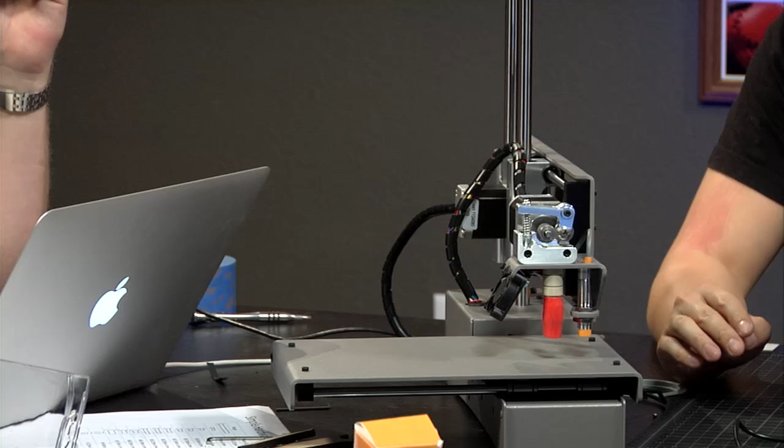So first things first, you've probably never seen me do this before even if you've watched every MakerBot mystery object we've ever done, but I've got to put tape on the build surface. All right, so explain the tape. Why is that painter's tape? This is blue painter's tape. It is 3M 2080EL, slightly more expensive than the generic 3M painter's tape. You mean the small, narrow, cheap ones?

Painter's tape is priced on both the width of the tape as well as the relative stickiness. Since this is going to go on the build platform, you want less sticky. What we do is just put it over the build platform, and I'm going to tear the— oh hellfire, there it goes. Okay, there we go, this is hard to do from this angle. This is not super sticky, but you kind of want to get no bubbles, and I just do a rundown.

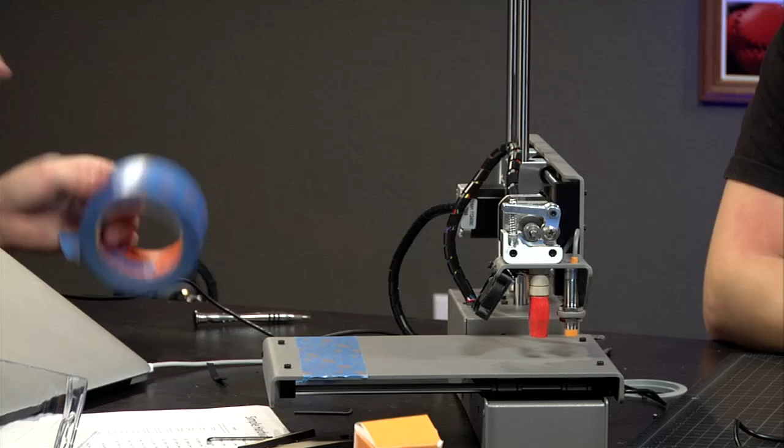Usually I use what's called Kapton tape, which you may remember from the space program among other places. It's space age technology, and what this does is give a better surface for the print to adhere to. This tape you use mainly because it's cheap and makes it a little easier. The reason you don't just use the metal is if you crash the print head into the metal, you can damage the print head, the nozzle, as well as scar up the print bed, both of which are bad for the quality of your prints after that point.

So it's very soft, basically a thin layer of protection to prevent you from doing something super dumb. It also makes it easier, like with a heated build platform such as our MakerBot Replicator 1 has, you can vary the temperature of the build platform to help release the print. The prints get really sticky, so all I'm doing here is lining up with the edge so there's no overlap, and it's even okay if there's a little bit of a gap, and then I'm pressing down.

It's super exciting stuff, but we wanted to show everything, so here you go. I think I got maybe one more piece. Now I might get you to do one.

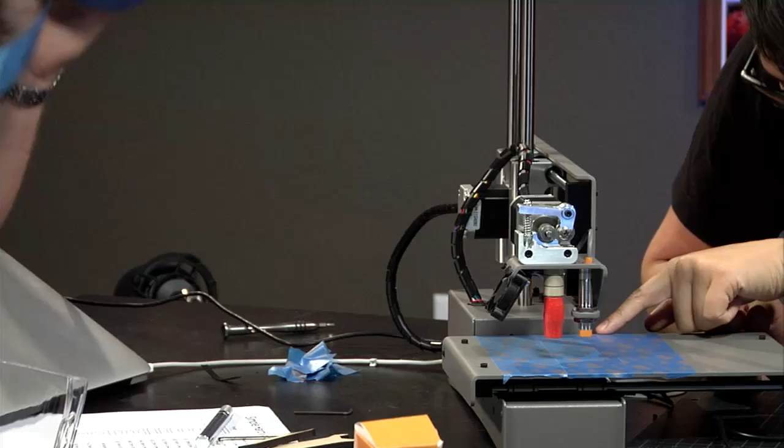How often do you have to replace this tape? It really depends on how often you gouge up the tape. Oh, you've left some gaps. That's okay, a little bit of a gap's not a problem. All right, you want to minimize those gaps as much as you can. I'll probably go back and redo this after if we use this for any mystery objects in the future.

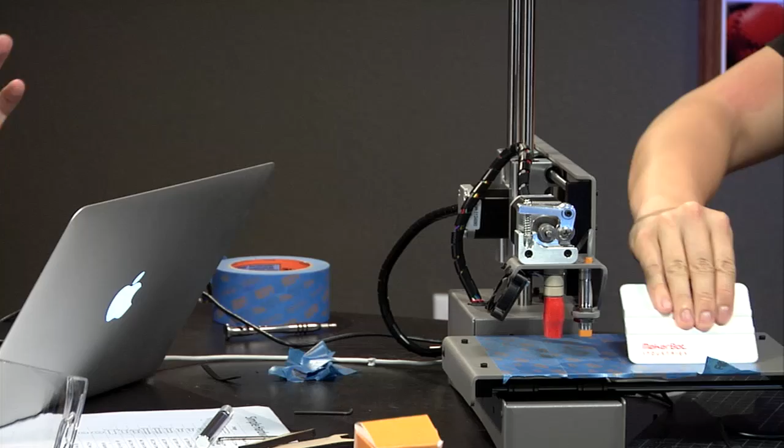And you also don't want to overlap. You definitely don't want to overlap, because what you're talking about is a printer that can print in 100 micron increments. 100 microns is about the thickness of a business card, like a good piece of cardstock or a decent sized piece of paper. If you have overlaps, the print head will crash into those places that the overlap runs, if you have the setup properly.

That's pretty good, a gap I got there. Did you nail it? No gap. Nice job. Never forget the gap.

So the first thing we're going to do is get the height on. We got two things over here. This guy on the left, the metal thing with the orange tip, is the auto leveling probe, and it's a contactless probe, so it has a sensor that detects metal when it gets close to it.

That'll trigger. There's a light on top that'll go off. The way you do this is you set it up so that this triggers when the print head is just touching the surface of the print bed.

Yeah, and there's somewhere here a little square piece of Delrin that's the right thickness. Is it underneath the printer? Square piece of Delrin. Oh, here it is. I moved it. That is more or less the height you want the sensor off of the print bed.

That's good, so you can calibrate. Sorry, I moved the printer, and now Joey has to run in here and change stuff. So I'm going to run this down just using my hand to turn the axis.

And we're going to run it down until just when it touches. Now figuring out just when it touches is surprisingly difficult. Oh boy. You're gonna get the extruder hit before you get the... You want that? We want that. Extruder is just—see, you can't tell because there's a shadow.

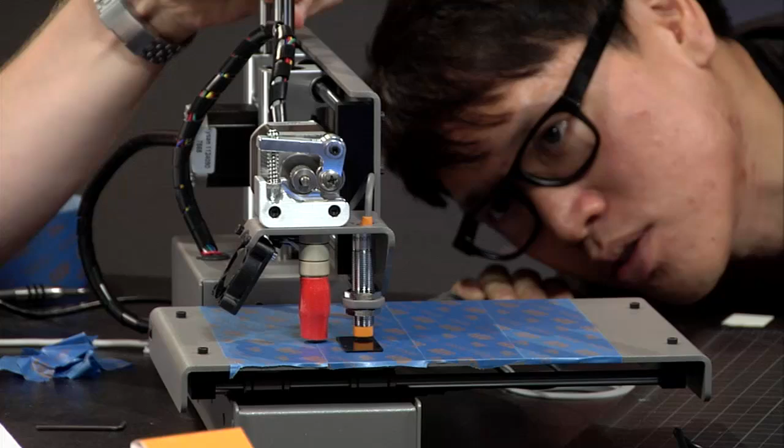Do we need a business card? A business card's not what we want. We want it actually touching, so we need something thinner than a business card. How about a piece—can you cut one layer of that? And we'll slide that under there to see.

The problem is there's always a shadow, so it's really tough to tell. I'm going to reach down here and grab a flashlight and see if that helps. Also, I'm right on a tape border, which is not good.

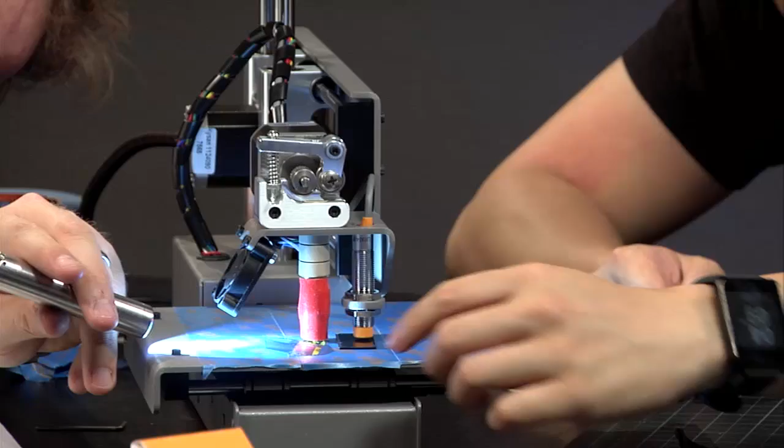I think that actually is looking—that's looking. I can still move this. Does it still move? So what I'm doing is, you don't want to push down on the print bed at all. Is that moving still? Yep, still moving. Oh, nope.

Okay, so a little looser than that. Okay, I think that's pretty much it. I'll go back down just... oh no, can't get under now.

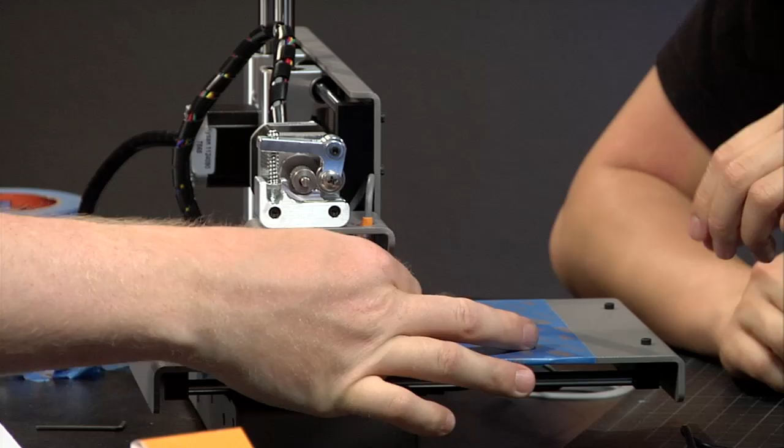Okay, that's good. So now what we're going to do is use these two kind of crappy wooden wrenches to move the sensor down. Which one? Those two nuts, and one of them's already... let's see, I think we need to go up on this one and up on this one, right? Yeah.

Actually, this is a good time to turn it on. So would you plug it in, because we want to see that light trigger, and we want it to trigger. All right, so I got power right here. I'm just going to plug it in the bottom.

There. Is there a power button at all? No power button. If it's plugged in, it's on. All right, it is plugged in.

Power supply right here. Let me switch over and see if my software detects it. Unknown printer, firmware disconnected. I'm not going to connect yet because I don't want it to do anything. But it has detected it, which means it's on.

There are no lights on this thing, no feedback whatsoever, except for... Okay, I am going to go to connect and go ahead and do it.

Okay, so Joe, if you want to switch over to the computer—this is Repetier, or Repetier Host. It's the Mac version of it, obviously. Basically what we're seeing is an emulation of our print area here. This is all the controls. This is a much more raw version of the software than we're accustomed to with Makerware. It's very reminiscent of Replicator G.

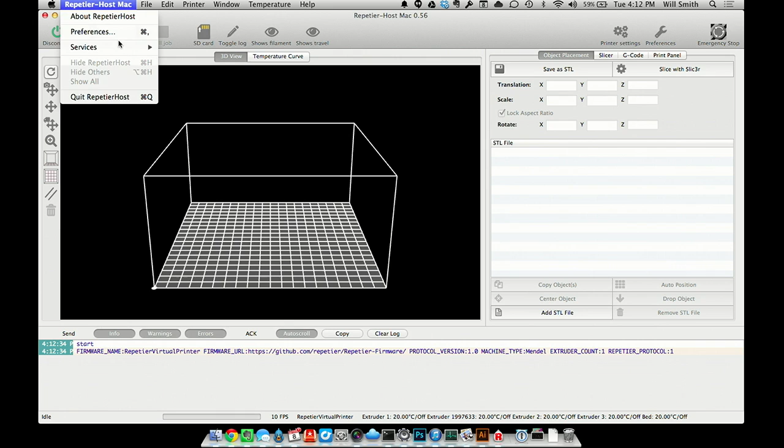Oh, and I'm hooked up to a virtual printer because I was noodling the other day. So let's go.

I'm going to disconnect. Do you need me to tighten and loosen these? No, leave it for right now. We're going to do USB modem 1, 2, 3, 4. Hit apply, hit OK, and we're going to connect.

Okay, so you can see on the bottom there it says firmware Marlin V1, Sprinter/grbl mashup for gen6 firmware. Nice. Printrbot protocol version 1.0, machine type Printrbot, extruder count 3. That's probably not right, but we'll get there.

Extruder count is 1, but it knows that Marlin, which is the open source project that builds the firmware for this particular printer among a bunch of others, including I think for the Makerbot—or Sailfish is the version of Marlin for the Makerbot.

But we have, let's see, extruder temperatures down here. I can do some stuff, so I'm going to go back. I've connected, we've done that. I'm going to go to the print panel and give the following commands in this order.

Okay, I'm going to give you... I will read them out. This laptop, so you can... very NASA. Or this iPad, so that we can do this.

See, this is a Chrome window. I'm going to Chrome this onto another device. It's my favorite feature of Chrome.

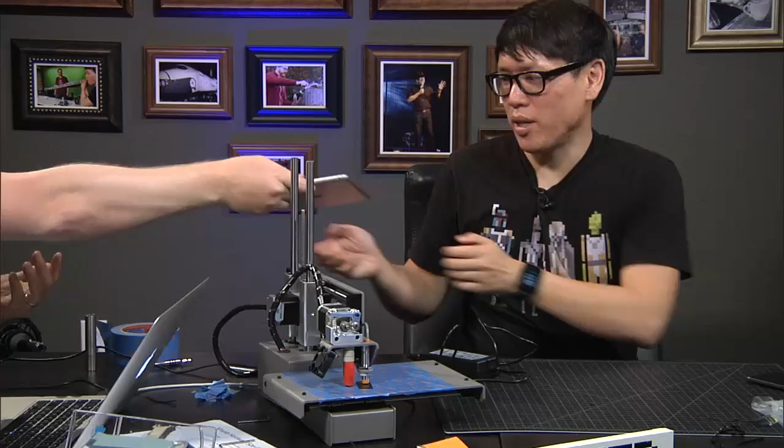There you go. Okay, all right. So we're on step 3. Heat on. I'm going to the print panel.

Give the following commands: heat on, okay, home X. Home X. Oh boy, something happened. Yep, X has now moved to its home.

Okay, now hit home Y. Whoa, okay, that's the Y-axis. Now we... oh, whoa, stop. Let me know if I need to pull power at any time. I don't think our Y-axis is tripping.

So these are the switches. Yeah, let's go. Should we turn off the power? No, because from this program, if you go back to the computer screen, you can manually adjust the Y-axis. I'm doing that right now. So as you tap, it moves 100 spaces. Yeah, okay, 100 spaces.

Okay, I'm going to hit the button. All right, is that stop? Is that triggering anything? No, I don't think so. So that tells us that isn't plugged properly into the board.

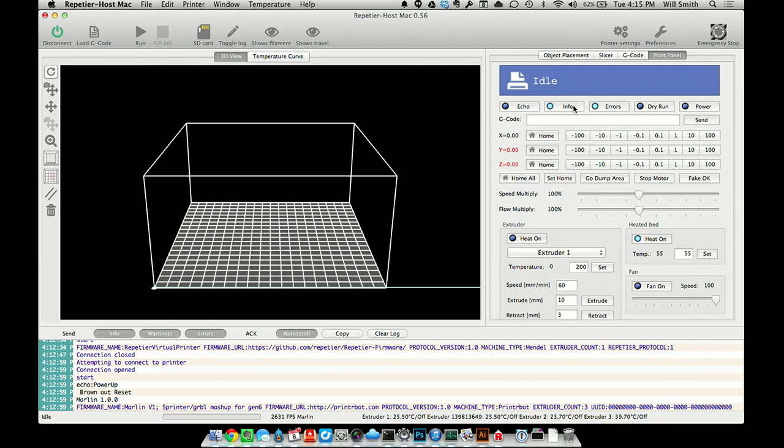I wonder if, but the X-axis did go right? I'm not 100% sure, because it doesn't look like it's centered on the X-axis either. It shouldn't be centered. It should be. Okay.

Okay, so I'm gonna hit home. Whoop, whoop, whoop. Okay, yeah, no, that is right. I'm pretty sure.

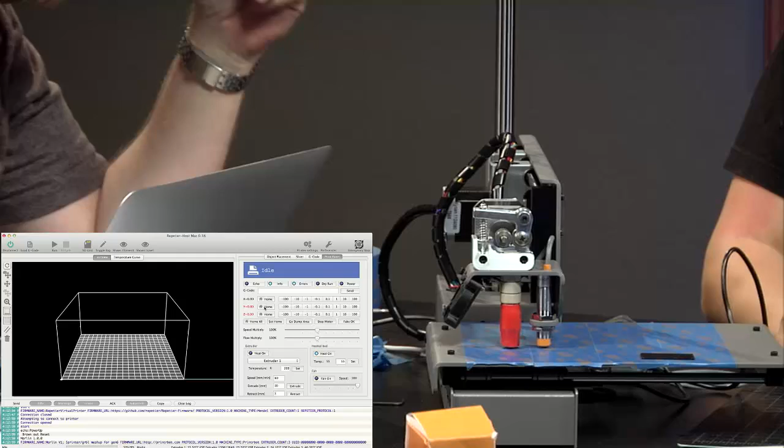It's a robot, you're telling it to do things. It is. I control the robot. I control the horizontal and the vertical. Well, you're controlling the horizontal and the other horizontal.

Okay, let's see, I'm going to turn on acknowledgements. Nope, that's not a good thing. That's too much.

Let's see if I can see if the trigger is working. Yeah, I want to see if there's... let's see, that's G-code, that's slicer. I can't see if the print...

I'm going to try it again and see what happens. Oh boy! Oh boy! Oh boy! Nope, stop motor, where's the stop motor button? Okay, there it is, it stopped eventually.

Where's the trigger? Actually, where's the physical trigger? We need to tighten that. Oh, tighten, yeah, I did a pass on tightening, but this is real. This is weird.

If you want to tighten those, cinch them down a little bit more. You feel that? Okay, it's still way loose. Just keep going, that's super loose. It's much looser than before.

Yeah, I think you're about to get as tight as you can get, so we might have to take that apart and redo those zip ties. Yeah, I am totally, yep, this is the tightest as it can get. See? That is way too tight. Or way too loose. Way too loose.

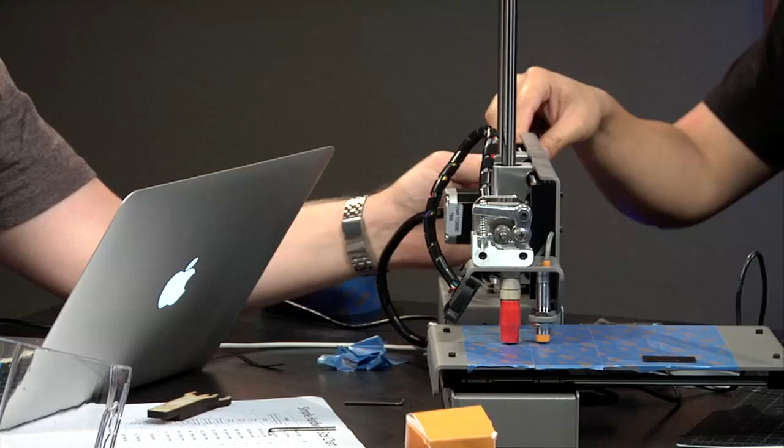Okay, so let's unscrew that. Okay, go ahead and unscrew that. That's a relatively easy fix. I'm going to start working.

Let's unplug it first. Okay, let's check the Y-axis switch to make sure I did actually plug it in and it's plugged in the right place and all that jazz.

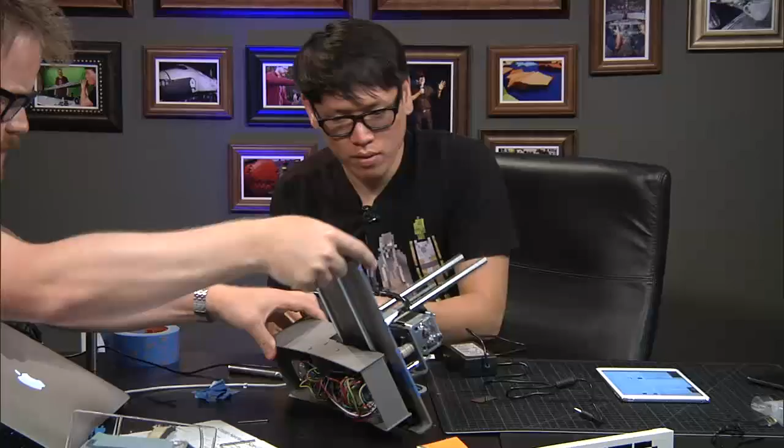And this one I can just unplug. Yep, all right, I'm going to put this down on its side. It's okay, okay, so this...

Okay, so that should be the Y-axis stop right here. Wow, which this is really, really loose. Wow, I shouldn't have put all these wires in like this. Okay.

Troubleshooting. Okay, I have the Y and X stops backwards. That's the problem. Well, regardless, we still need to make this tighter. Yes, that needs to be fixed. That's not that difficult.

And again, this is like they didn't tell us which axis was the X and the Y axis. I mean, it's the kind of diagram thing. Yeah, it's the kind of thing you should have known, I guess, for the general control board. But yeah, the board's labeled, but we don't know which axis on the machine is the X and Y axis.

Now, my question, Will, is you're gonna have to cut that off. Yeah, you need... let me give you the scissors. Snips. Oh, I'll cut them because we don't have snips.

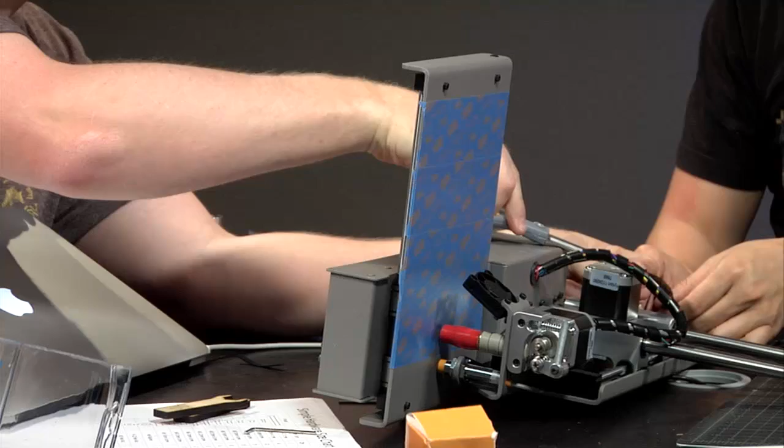So, it's all right, you can just cut them. Yeah, here you go. The trick to cutting zips is to get the outside edge. I can't get it from where I'm sitting. There we go, and just pop off the top.

We're not wearing safety goggles, Norm. I'm holding my glasses real tight to my eyes. Okay, that's good. Pop it, pop it. These scissors are not super sharp.

Hey, remember that time I cut my finger off while we were building a 3D printer? I don't want to.

Oh boy, that hit my face. Did it really hit right there? Yes, it hit my face. Jesus, are you okay?

Okay, so what we're going to do is tighten first. Let's get it up so we can see what's going on here. Now that's reasonably tight, I'm going to go one notch further. I want to put this through these first so we see how far we have to work with.

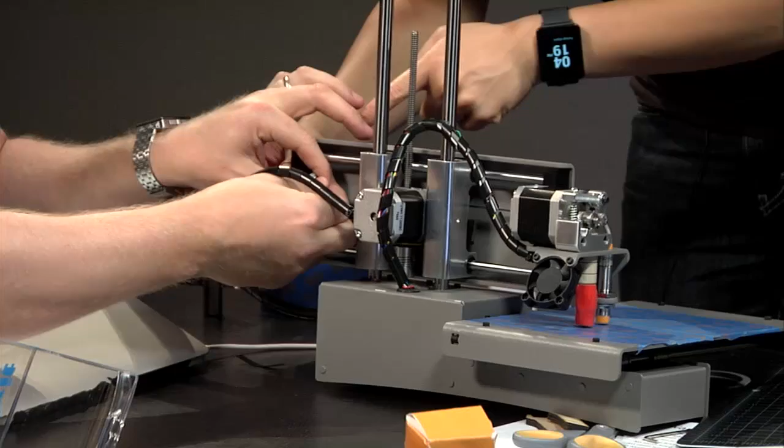That looks pretty good. My hands are smack dab in the middle of the way, sorry. You can put a little bit in there. No, put that in last. No way, dude, we can't pull it tight enough. We can—this is as loose as you can get. This is the mistake we made last time. I'm gonna show you, so you're gonna tighten first?

I'm gonna tighten first, and we're gonna tighten right up at the dongle. So I'm gonna do this. Shit, sorry, small zip ties. How did you do this with one hand? That's impressive.

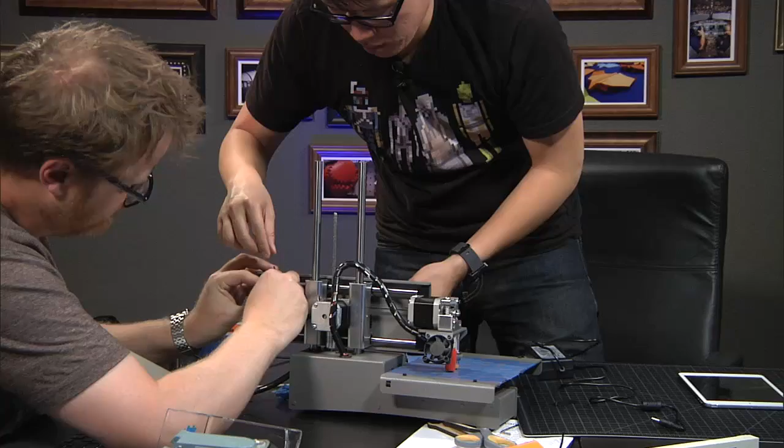Okay, so what I'm going to do is pinch this down and pull. But first let me make sure we're a good distance. Okay, I can close that gap. Actually, I'm going to give it a little bit more, a couple of cogs worth. Okay, I'm getting ready to pull for all I'm worth. That's not enough—nope, don't pull for all you're worth, I just need you to keep it taut.

That looks pretty good. I'm pulling it pretty tight, and you need to get that super tight right up against the edge of the thing. It doesn't have to be in there. Okay, that looks pretty good. It's biting—yeah, it's definitely biting.

Okay, I'm going to cut the tip off. We can tighten it more by just pushing it back. All right, too late now. No, you can't push it back, it's a zip tie, but you can kind of crank it. Ratchet it, you mean? I don't think it needs to go any tighter because the thing you don't want to do is squeeze that belt so that you lose the tension on it. Where's the driver?

Let's cinch this down just a little bit, and we can plug her back in. Oh, it's much better on this side at least. Maybe it needs to be tighter on this side. Well, it's all one belt, so as soon as you move, as soon as you ride the carriage along, it should be the same tautness on both sides.

Okay, that's pretty good, my level looks pretty good. You want to try sliding? Yeah, that's pretty good, that moves nicely. Okay, moves much better. Alright, so let's get everything—hold on, there's stuff underneath it. I'm going to plug this in.

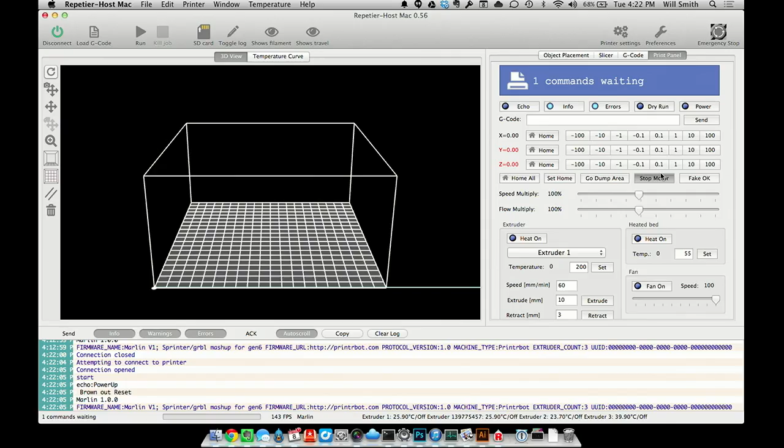Okay, so now I'm going to home the x-axis again. Oh Jesus, nope, oh Jesus. Okay, stopping, stop it. Stop, that looks like the y-axis, or z-axis. Okay, I'm going to do the same thing on the y-axis just to see what happens.

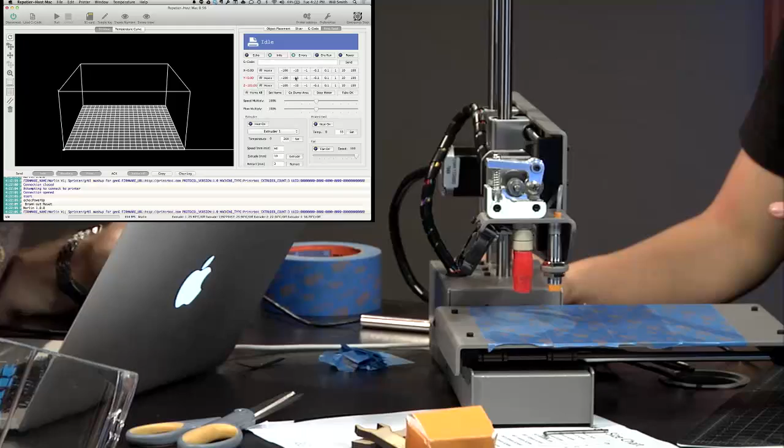Let's go up on... oh yeah, that's definitely Z. We're going to go up some. Oh boy, what happened? I wonder if this switch is too close and isn't able to trigger. So is Z actually Z? Z is actually Z, okay. Z is good, I had no question which one Z was.

Okay, now let's try Y. Yeah, I hit 100, which takes a while on Z. Okay, it's a more precise axis usually. So if you think about the way this is going to work, the screw has to turn more turns to go 1 millimeter than the belt has to ride.

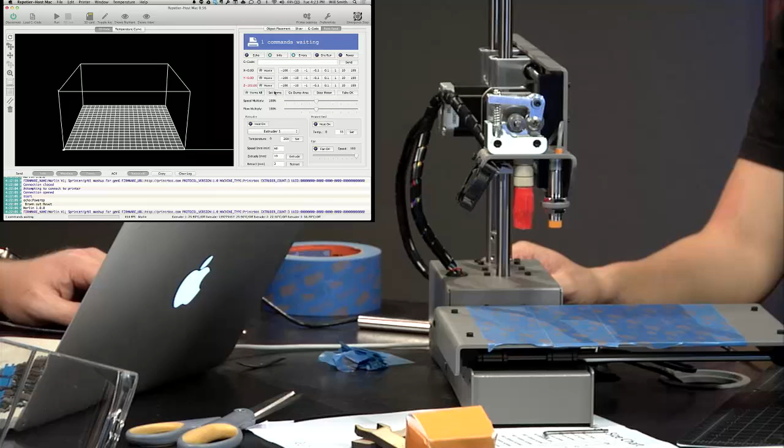I hit stop, but it's not responding? It's too late. Well, I can emergency stop, I should look and see what that command is. I feel like that would be useful. Would have been a minute ago. Okay, there we go, there's 100.

Okay, so now I'm going to bring the y-axis back and we're going to see what happens. Okay, so now I think it thinks... oh that looks like that should be... that's the x-axis, yep, that's X for sure. It thinks... let's see. That's Y. That's good, it's stopped there.

Okay, is that the most it can go out? Is it hitting anything? It should hit at... yeah, it's not hitting that switch. Where's the switch? It's in here, like this switch isn't hitting. Right here, okay, depress it again? Hold on, did we put this in backwards? No, the switch is in the right place. Oh jeez, it's okay.

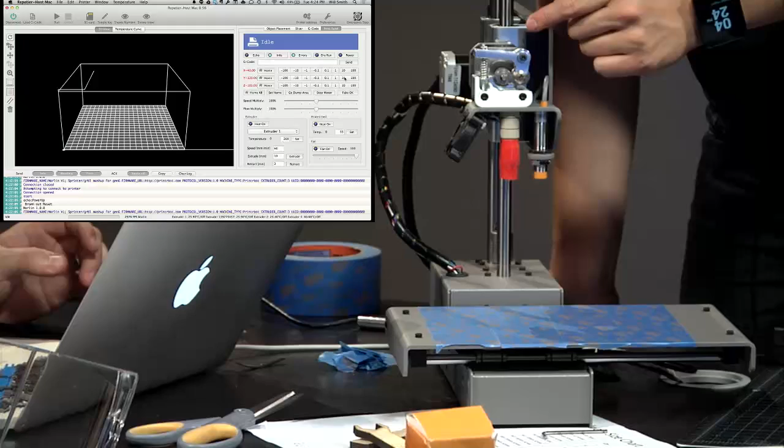Nope, not hitting the switch. Oh, I know what the problem is. Is it that zip tie? No, it's this zip tie right here. How is this loose? Oh, it's slipping. Yeah, it's this zip tie, not that one. This one's slipping too. No, it's this zip tie right here.

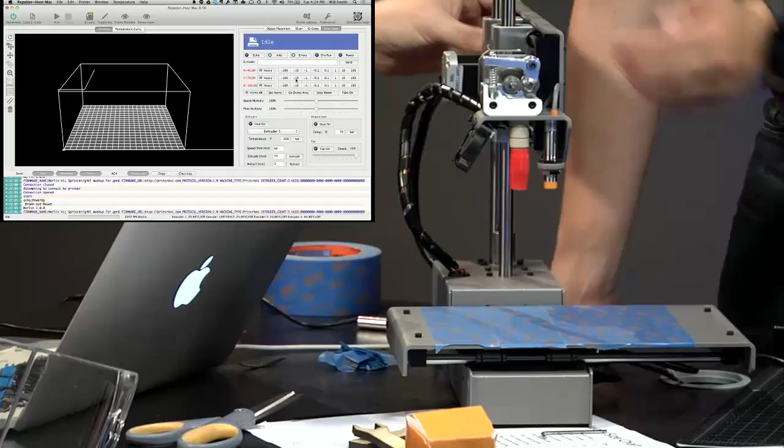I understand what you're saying, I agree, but this one's slipping too. Like this isn't in teeth, and it definitely was a minute ago. I think it's because it was dragging. You think it was skating? Yeah, okay, well let's...

Hold on. Oh boy. Okay, turn off the power please. Oh, let me disconnect first.

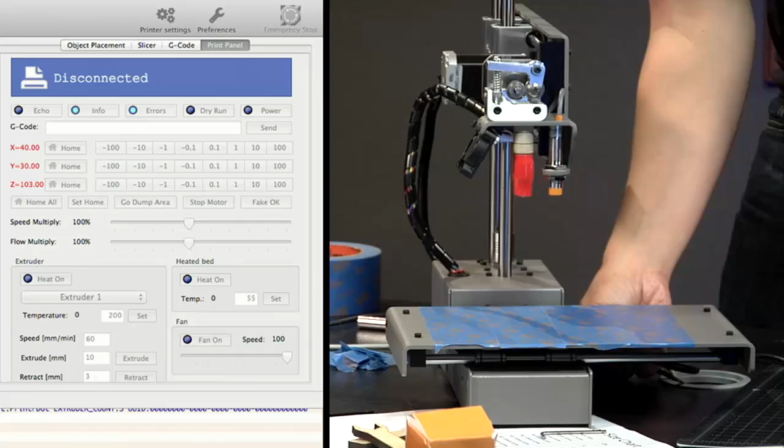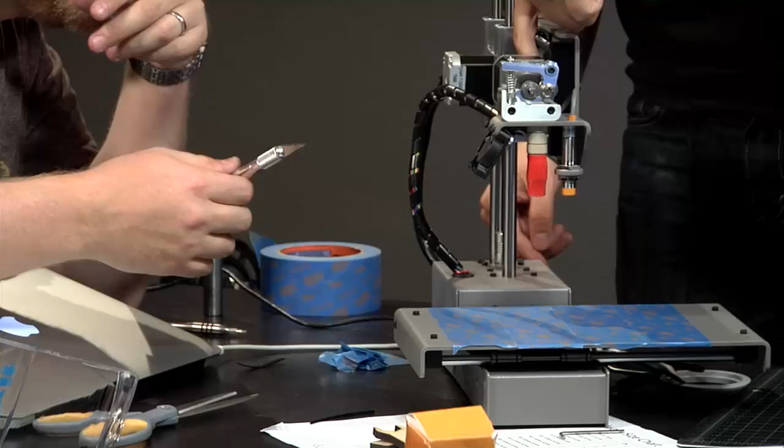Okay, so now we got to take this one off. I know, so this one, or it could be, yeah, you need to take it off. No, it has to be taken off, and it needs to be slotted in there if possible, in that hole. What do you mean? Because it can't push out, because it's blocking the Delrin, because it's hitting the metal. So it needs to be in that hole. How is that even possible? Very good question. I think we can rotate it so it's up instead of out, because the problem is it needs to be on the top, not on the side.

I don't know how I'm going to cut this one, though. This is where written instructions would be really handy.

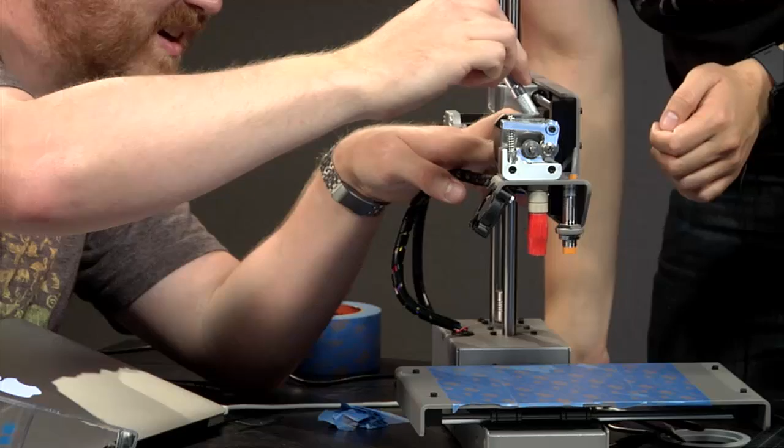I'm going to loosen this. Does it need to be loosened here? I don't think so. Okay, I mean that might make it easier. Oh boy, I apologize, surgery. Let's see if I can just get this right here. I learned my lesson, I'm not going to look at it. These scissors aren't great, that was something.

This is where the clarification instructions are super useful.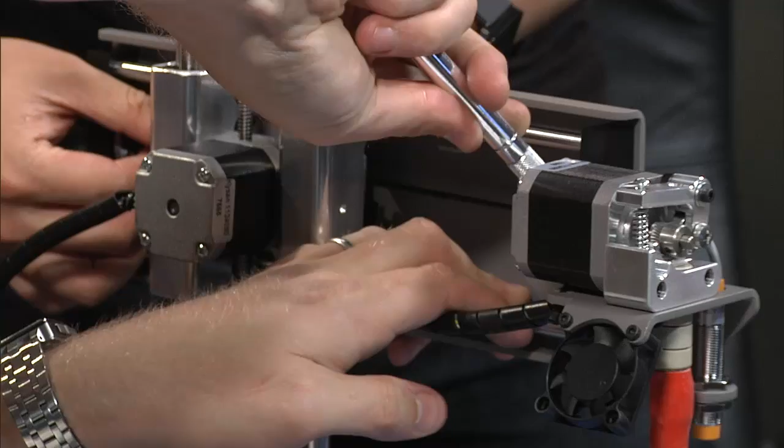Taking apart zip ties, taking apart zip ties. Really, there it goes, there we go. Really wish I had a wire snip for this.

Okay, so you know what? We should loosen this one so we have as much slack as possible on this side. I'm gonna find the driver. You can just use your finger, dude. It's loose. There, done. Okay, so let's think about how this is gonna work. I'm gonna rotate around so people can see a little bit. Poor Joey.

So right now this needs to be tied to that. Yeah, let's loop this around here, and the zip tie that starts to cinch. I don't think you can put it on top because it's not going to lock. Yeah, it'll be square, it'll go like right there. Okay, all right, I mean, I think...

I don't know, I think you're going to have to do the zipping, and I'm going to have to squeeze again. Okay. You know what? Let's take this all the way off on this side. I got that, okay. Completely off, which gives you as much slack as you need, which is good.

Okay, so I think pull from right there, and I'll hold it in place right up against the wall. Okay, pull, you're pulling. Okay, how are we doing here? Let's see, are we still cinched? Yeah. Okay, so give it one more. Yeah, I think that's probably pretty good. That's good? Okay, okay, so I'm going to snip.

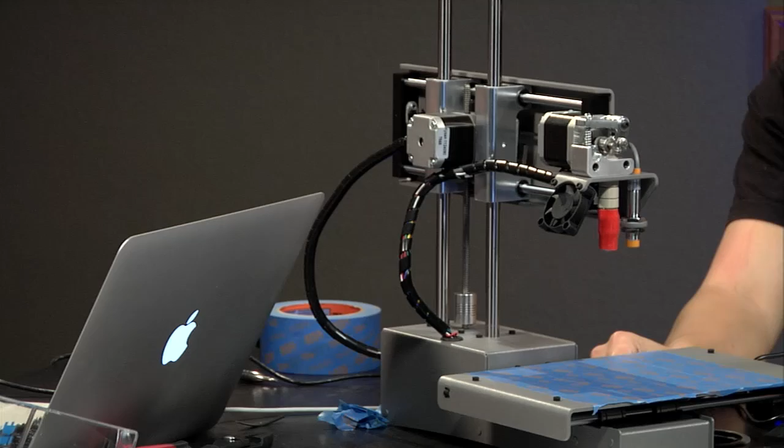Okay, power? Power. I'm going to move this, I'm going to twist this zip tie around while we're here. I bet we're going to have the same problem on the x-axis. Are you powered up? I'm powered up.

Last updated printer firmware, and it failed. Okay, great.

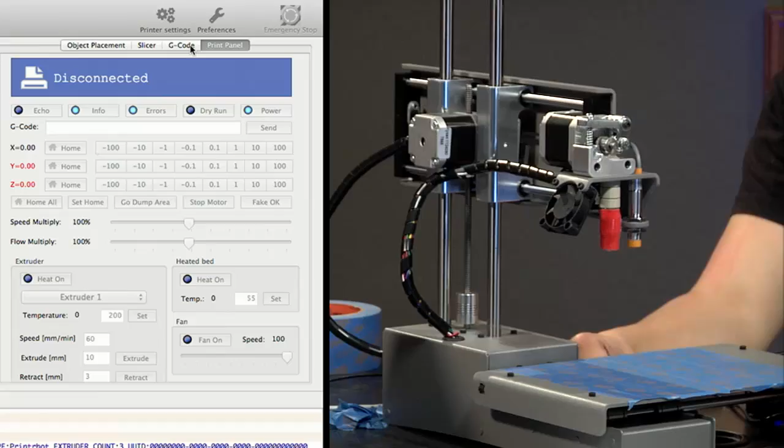Okay, homing X. Oh boy. Nope. Power. Nope. Stop. Power. Unplug the power. Oh, Jesus, I forgot to switch... remember when we switched the...

It's okay, it's okay. Adventures in 3D printing. Yeah, that's the kind of noise it makes occasionally if the end stops. If you remember, I don't think the first MakerBot even had end stop switches. I think it just, you set it at zero and it knew not to go past a certain point, which was great until belts started slipping, and then bad things happened.

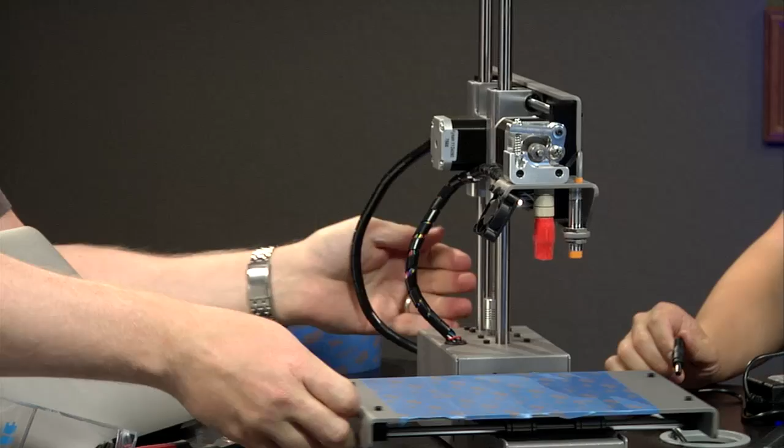Okay, all right, power back on. Power back up. All right, let's try small increments of moving X and Y.

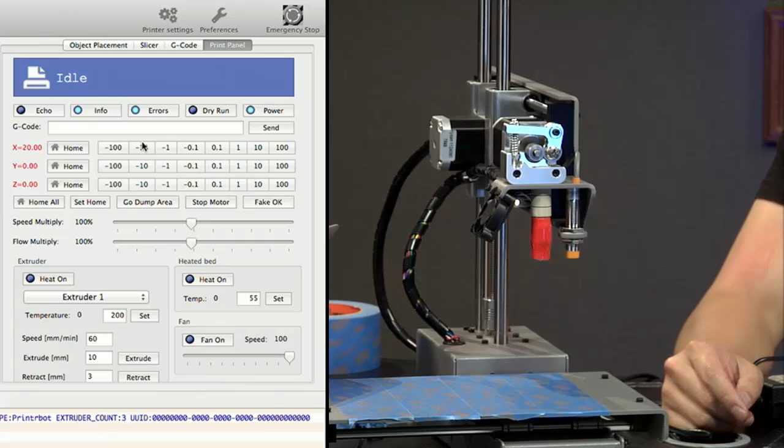Jesus Christ, which one is that? 100, minus 100, for what? Oh well, okay, X is moving. Okay, that's the wrong way, we needed to hit the... isn't the button on the other side? Why is it stopping?

Huh, is it only moving in one direction? No, it's... oh, that's, you know what it was? It thought that it was homed, and it wasn't. Okay, so that one hit, I heard that one hit the switch. Yep, that's good. Let's try the same thing with Y.

Okay, let's get crazy. Yep, that's good. That's better. Okay, awesome, feeling good about that. Let's see, where are we next?

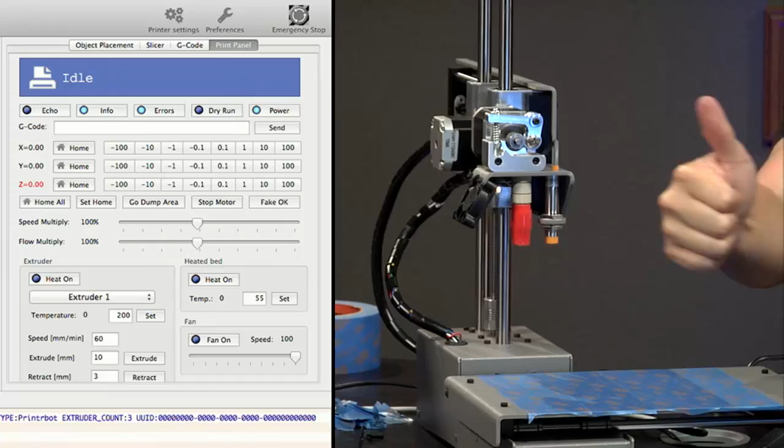Heat on, home. Oh, I didn't turn heat on. Wait, heat on already? It said turn heat on. Oh okay, let me pull up those: heat on, home on, heat on, home X, home Y, stop motor, in that order. Heat on and stop motor. Okay, so wow, this is like the...

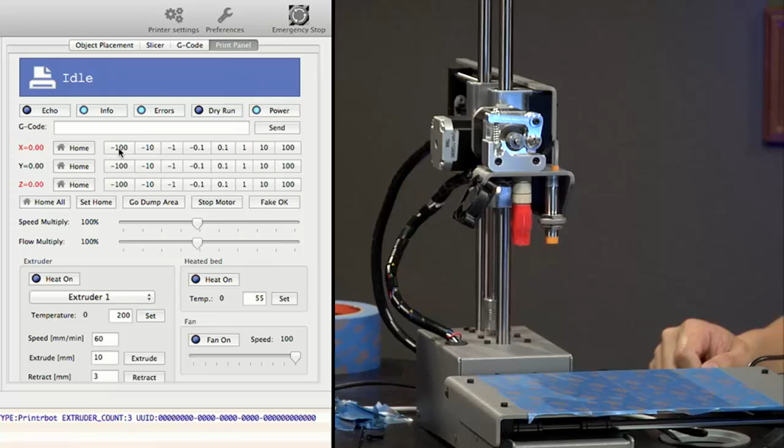Let's restart, okay, let's do this whole thing from the beginning. Okay, I'm gonna move my X, move my Y. Oops, I feel like X and Y might be backwards.

Give me an unplug and a replug, and we're gonna go through the whole thing. All right, unplug, because I was hitting heat on for the heated bed, which we don't have. Now plug it back in. Now power is in, okay.

Okay, so now we're pressing connect. Okay, I'm hitting heat on. Home X or home Y first? Home X. Home X, that looks good. Home Y. Home Y, also now it says much better. Heat on. Heat on again, so that turns off the heat. And stop motor. Stop motor.

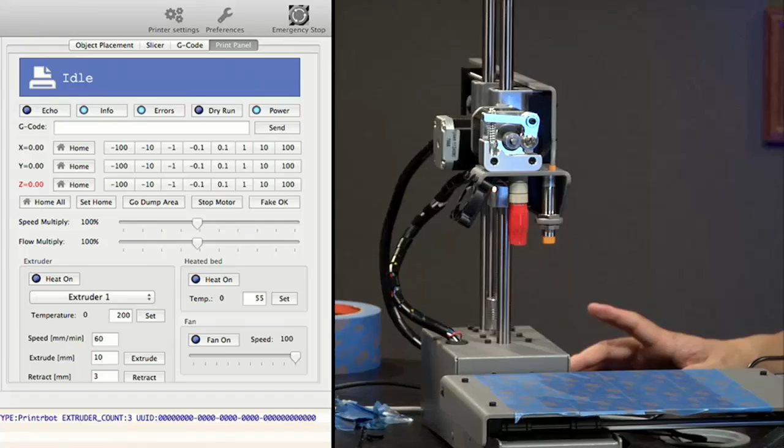Okay, monitor the temperature of your hot end extruder by selecting the temperature curve view. Temperature curve view. Oh, you guys can't see that right now. There you go, okay.

Joey moved it back over. Okay, so the purple line must be the setting, and the red line must be what our actual temperature is. So the purple line, your target right now is 200 degrees Celsius. That's my assumption, that's right there. You see extruder 1, temperature 200, and you can change it right there.

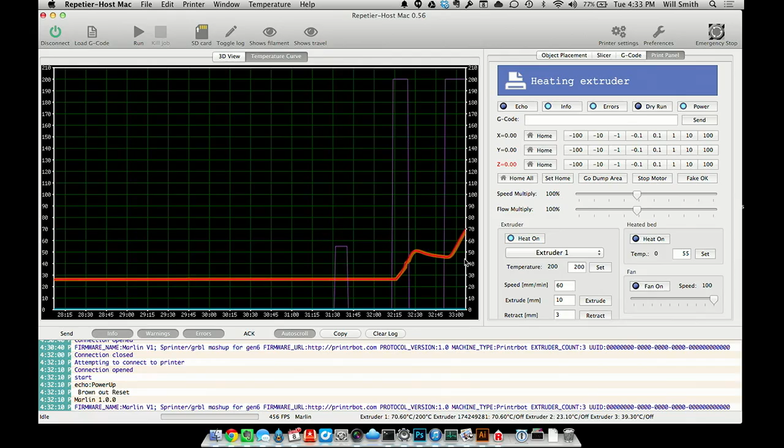Yep, that's good, you want 200 between 200 and 210. Heating up nice and quick. That's good, that's good, that's good. What's next? We're on step 4 after that. That's pretty exciting. While your hot end is coming to temp, open your slicer settings.

This is a Slic3r. Go to the slicer tab and click configure. Configure, okay, okay, I clicked it. There it goes, something's happening. Under the printer settings tab. Printer settings tab, okay. Select custom G-code. Custom G-code, remove any existing G-code in text.

From everything or just in the start G-code field? Done, and enter the following. I'm going to copy and paste. It's this G28 X. Mm-hmm, yep. Z-zero. Mm-hmm, and I bet, yep. And you need ones, I don't know.

Yeah, spaces. Oh, it's Y0. I got it. Oop, did it again. And then 0, I'm going to type this in. G29, okay, that's good. Is there supposed to be a comma? Nope. No, that's good. Click the disk icon to save.

Disk icon to save. You know what I hate? Disk icons. This is a Printrbot Simple. Okay good, okay, that's it?

Once the hot end is at temp, insert the filament. So at this point I'm going to open our filament bag. Sweet, so we have a bunch of filament, but this came with a little bit of filament. I need some scissors, Exacto? Here you go.

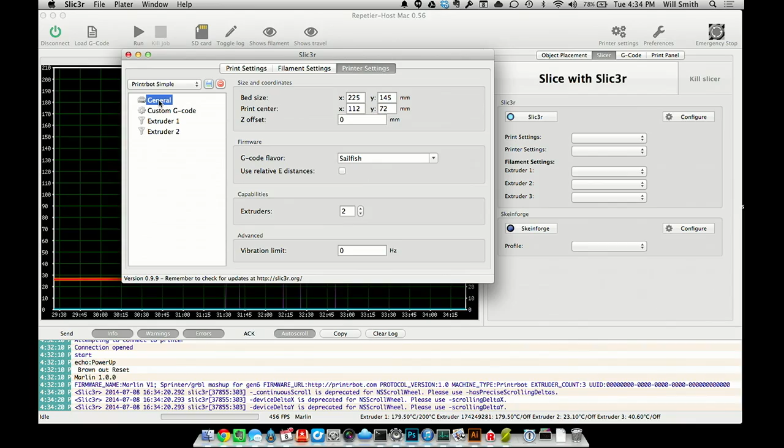One thing this printer doesn't have is a spindle. Could we print a spindle? I'd think we could probably print some sort of solution. I'm thinking what I might do is build a thing that hangs off the bottom of the MakerBot table that has all the different spindles on it, so it's easy to feed regardless of what printer we're using.

Huzzah! Wow, this feels like some cheap filament. It's really brittle. It's PLA. That's the way PLA always feels. You're used to ABS, dude, which is nice and soft and shiny.

Okay, once the hot end is at temperature, insert the filament. I'm going to close the Slic3r settings. Oops, we are at temperature. Wow, that's fast. Well, the hot end is always fast to heat up these days.

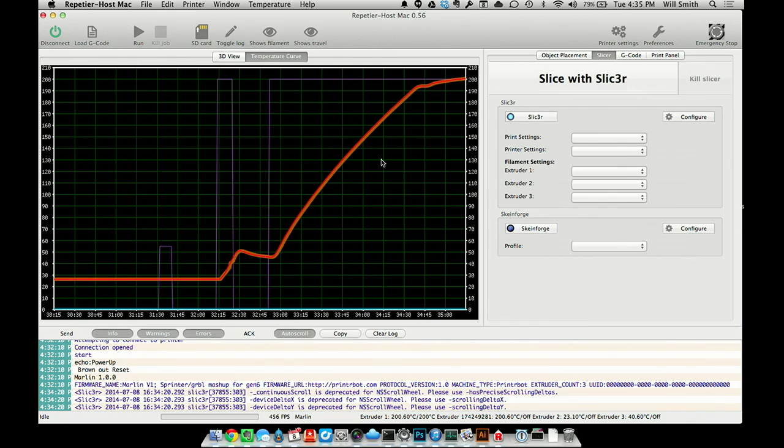The thing that's slow is this tie. Just untwist it, it's not a twist tie. Oh, it's a zip tie? We'll cut off the chunk.

Bam. Did you just look away? Yes, I didn't want it to hit me in the face again.

Shameful. All right, okay, filament. Oh, this is funny feeling filament. You're right, it feels dry. It feels old. Usually filament feels a little wet, and this feels kind of dry.

Okay, oh boy, this is how you get filament hobbled. So there's my end, I can't find it. I feel like the ape at the start of 2001. Okay, here we go. Wah, wah, wah, wah. Boom, boom, the hole right there? That is indeed the hole right there.

Compress the extruder spring. Ah, good. So you're just pressing that down? That's my intention. Yep, there you go.

Guide the filament on top of the extruder, past the drive gear, and down the guide into the hot end. I got to go in the hole. Yes, push the filament into the hole.

And be sure the filament sits in the teeth of the drive gear and feeds straight into the hot end. Be careful, the hot end will be hot. Yo dog, I heard you like ends that are hot.

I smell something, oh my God, lightly burning stuff. Well, it says step 6: manually feed the filament through the hot end by compressing the extruder spring. You mean like this, pushing the filament down? Oh yeah, so it should feel mushy, and it should feed through the hot end.

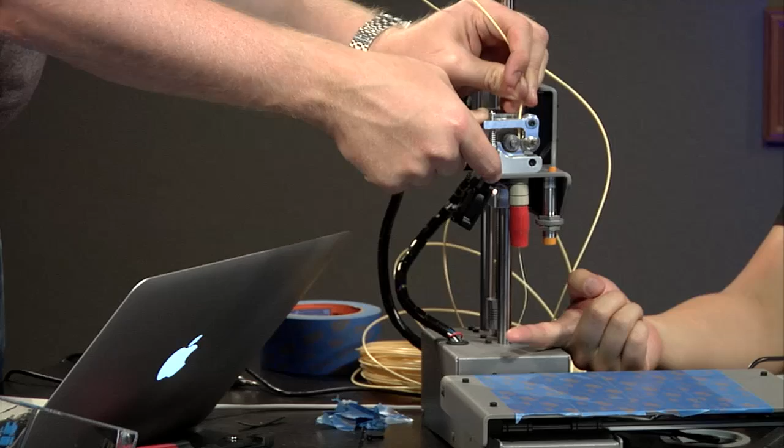So we should, oh there it goes! Oh there it goes, ew, it's pooping. It's pooping plastic. Hey guys, I'm a 3D printer. You're a 3D printer. Okay, so how much of that do I have to do, or are we good? No, it's good, it's good.

Okay, turn the threaded Z-rod axis counterclockwise to touch the hot end onto the bed. Turn the threaded Z-rod. Okay, so let's get the... okay, so you're manually turning this a long distance. Yeah, that's right. Boy.

Screw, Norm, screw! So when we press stop motors, one of the things about stepper motors is as long as there's power applied, they'll hold position. Some of the early printers, it was a bit of a challenge to get to a point where you could hold position without the motors overheating, because they do tend to get warm when you're doing this. A lot of newer printers have fans on the motors to help control that. This one doesn't.

The plastic spacer should fit snug under the auto leveling probe. The Delrin spacer, here it goes. Yeah, it's going to be right there, or thereabouts.

You're going to take over? Yes, it goes faster when you use the smaller one. Requires a little more finger strength, though. More torque, fewer turns. Yep.

Can you take the, let's swipe off. So one of the things you want to be careful with when doing 3D printing stuff is touching the hot end, because it's 200 degrees Celsius, which is instant burn hot.

Balls hot, it's hotter than balls. Balls are 37 Celsius, so it's at least 5 times hotter than balls. 5 balls hot? 5 balls hot.

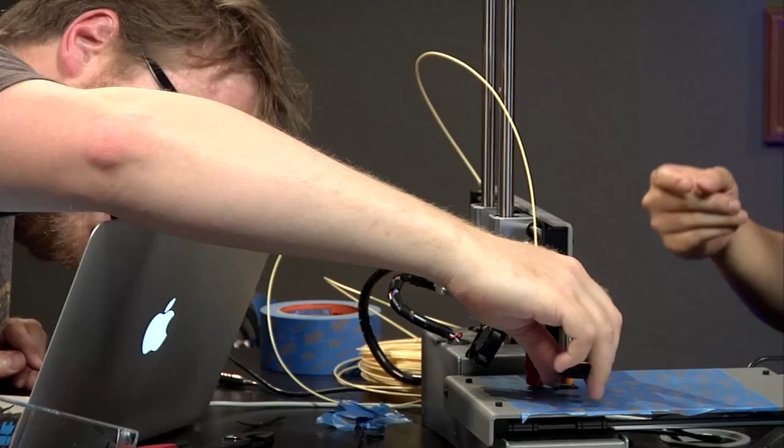If they had 3D printed a wrench that's the right distance, that would be amazing. It's the double wrench, locked at the same height and vertical distance, so you slot it in. That would be so good. It would be simple to do with the notch.

This sucks. I think you loosen the top first. I really wish we could use the bottom one to push.

Hey Norm, that hot end is real pretty hot. Did you touch it? It's the McDLT of 3D printer parts.

Okay, I think a little bit more. Is the light on top of that thing? No, yep, light's on. So go ahead and cinch that down. Does the Delrin come out? Yeah, no, this way.

Your wrenching is terrible. This is a terrible wrench. Don't blame the tools, Norm.

Okay, here, good grief. Okay, you need to tighten the bottom as I... is it turning? I don't think it can. Oh, we just lost the light. The light went off. No, it's okay. I think I lifted it up too much.

Okay, so then let's bring the bottom one up. We want the light to be on? I think we want the light to be on. That's what the video said. I watched a 15-minute video about this process.

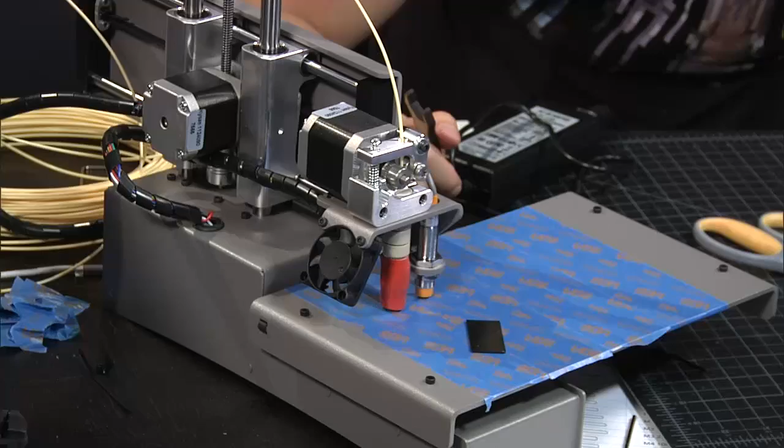I think we want the light to be on when the tip is pressing. Light is on. Is the light off now? Light is off. Is the light on? Nope. Is the light on? Nope. Is the light on? Nope. Lower. Hold on, I think I just cut a divot in the tape.

Jesus Christ. Might need to go a little higher. Could have just caught on fire. Hold on, don't adjust it yet, let's see what it's supposed to do. Smells like Bernie.

The plastic spacer, blah blah blah blah blah. I think that felt pretty snug. Do you feel like it's snug? Where's it supposed to touch the hot end tip on the bed? It's much harder than it sounds.

The light isn't on, that's a problem. Oh, there it goes, light's on. Okay, off. So it's touching right now. Is it on? Nope. Is it on? Well, I also had the spacer there. That's fine, the spacer won't matter. Nope. Still on? Yep, okay. Tell me when it goes off.

On, off. Okay, let's see, is it on? Off. Is it on? Nope. On. Okay, so let's... it's worse than finding studs.

I want to see if that scratches. Oh, I left a little bit of a divot. That's mostly plastic I think. I think we're probably good. Yeah, okay, let's try that.

All right, so now I go to the Repetier print panel and send this following command. Okay, G-code. I assume G-code is... oh, print panel, in that field, send G-code command. Yep, got it, and it's 212. M212, space X0, space Y0, space Z0.

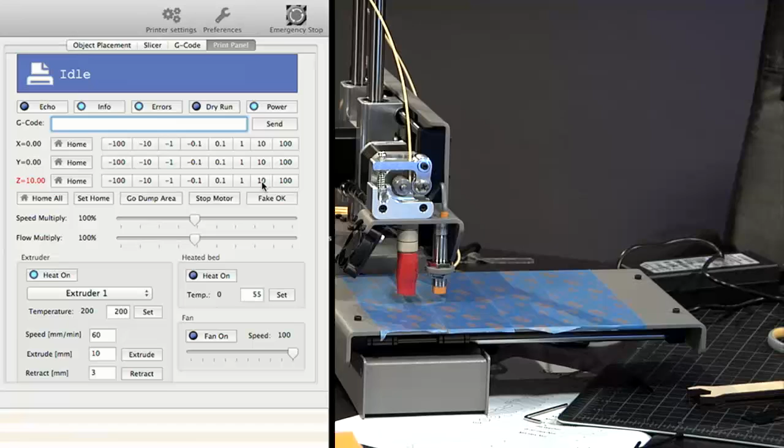Okay, so now we should have Z home, as well as X and Y. Oh wait, except for I moved a bunch of shit. Oh, let's home. Oops, let's go up 10. We don't want to fuck with Z anymore. No, Z is locked, but we need to calibrate, we need X and Y to home again.

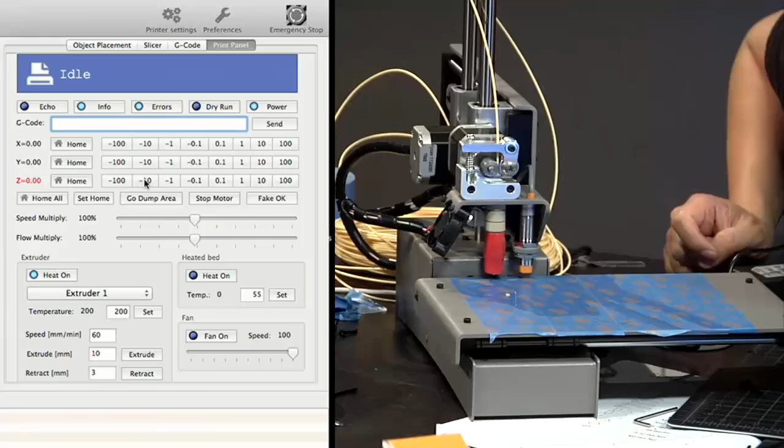Home X and Y. Home. There it goes, go to your home. Oh, that's probably actually homed. Okay, so now down 10. Just 10, tell me when I just printed 10. Tell me when the red light comes on. Light's on, okay perfect, we are going to set home.

Set that command again, M212. Send. Okay, so now that's telling the printer, hey, this is your zero. This is the zero point on all of your axes. M500, capital M500. Okay, enter to save. Yes. Okay, send. And M501 will check your work.

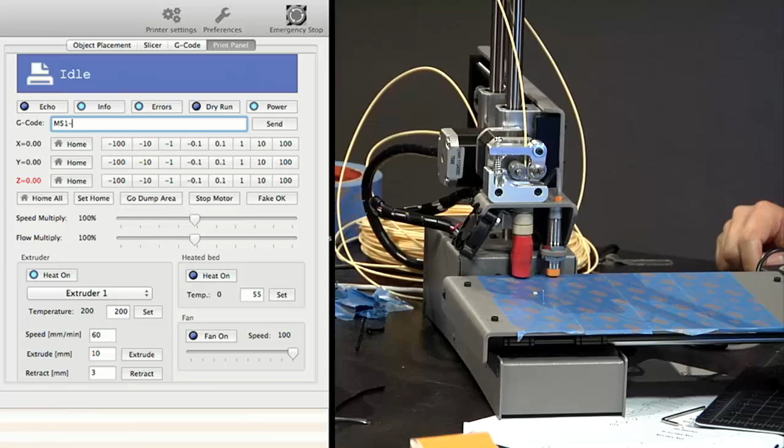You gotta load the code. You can use whatever you want to print. I don't have any G-code. Is there something in this? There's a link that says you can download a simple fan shroud. Oh, that's good, there's a link on step 9. There you go.

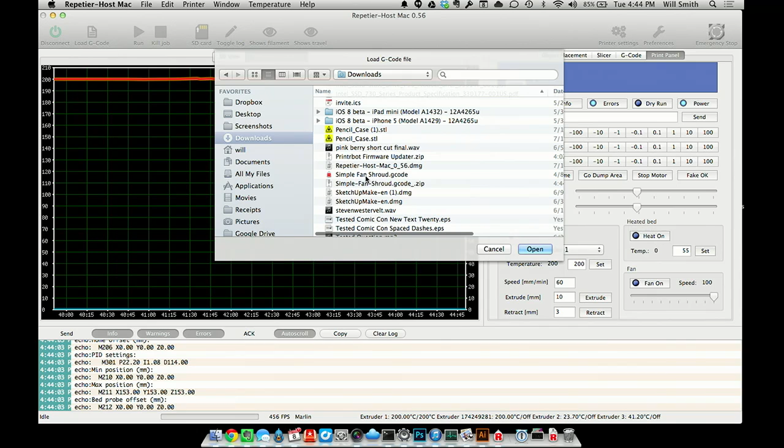Okay, and this is it. This will be our first print after. Wow, oh we have to watch this in time lapse? Are we going to have to sit here and move very quickly while the print goes very slowly? Simple fan shroud G-code, okay let's do that.

Hopefully this works. All right, so the G-code is like the actual line-by-line instructions. Yeah, so as a general rule, I don't like doing straight G-code. I like to take a model, slice it, and then run the G-code from there, so that anything that's weird about my printer gets adapted for the printer.

What do I do to make it go? Run, load G-code, run the job. Click the play button to run the job. Well, okay, here we go. Oh my goodness.

It sounds like a 3D printer. So the first time we printed something with the first MakerBot, what's it doing? I think it's leveling the build platform. I think it's confirming that the Z-axis light's on, light is good.

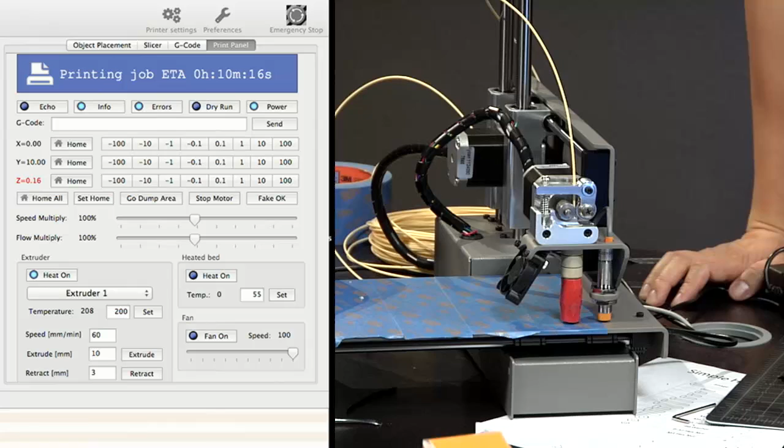Okay, it says there's a 10-minute ETA on this job. That's not bad. It's heating up. Oh, that's fantastic, there we go. There it goes.

Oh, it's printing. Oh, it's definitely printing. Is it sticking? Yeah, it's sticking around. Oh, that's good. So I guess this stuff has to, that thing has to not touch so that it doesn't whack into the model. And it's doing these 4 corners, which is, oh boy.

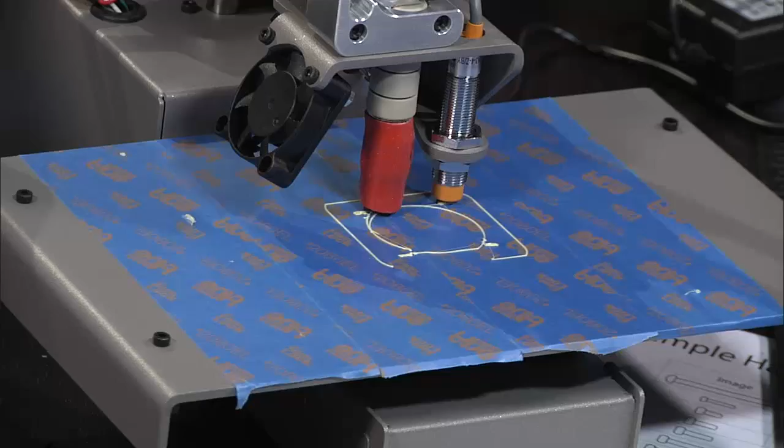This slicer, on most of these prints, it has a different sound than our printer. Could also be the rods and the motors. Well, no, that's the stepper sound. But one of the things that's neat about 3D printers is every slicer, even when you use a different slicer on the same printer, they all make a slightly different music.

So I think you could be a 3D printer whisperer. I talked to the ArcAttack guys because they make music out of Tesla coils, and they have a history of building musical instruments out of things that are not traditionally musical instruments. So I said they should be using 3D printers to make music, but I don't think they're cool enough when you're used to working with lightning, harnessing the power of lightning.

I feel like this needs to be a little bit lower, but we're in a good starting spot. Yeah, this is better than the first try with the MakerBot. With the cupcake for sure. This might actually print, and I like the time estimate it gave you.

I don't know that the fan is actually working though, or maybe the fan only comes on at certain temperatures. You see it not spinning? Oh, there it goes, I just turned it on. Oh, you just turned it on? Okay, manually, all right, well that's good.

Is the point to have the fan on at all times? I don't know. One of the neat things about PLA is it cools faster and is more stable. This is really an ugly first layer. It's more stable as it cools, like it doesn't shrink too much. You can make much steeper overhangs with PLA than you can with ABS.

Don't be so judgmental about the 3D printer. Well, it's kind of fuggo. You didn't set the micron thickness because that was all in the G-code. That's already done, yeah, pre-done in the G-code. So who knows what's going to happen here? This could be for a lower resolution printer or all sorts of stuff.

But right now we're printing, no mystery, a fan shroud for the Printrbot, for that fan. This is pretty impressive so far. Just from an up and running standpoint, it is a dramatic improvement over even the Thingomatic, which is the last kit MakerBot built. We don't have a ton of experience with the modern 2014 state-of-the-art kits as an alternative, but this is promising. This is very promising, and if you get something that's even close to usable on your first print, I consider that a moral victory, if nothing else.

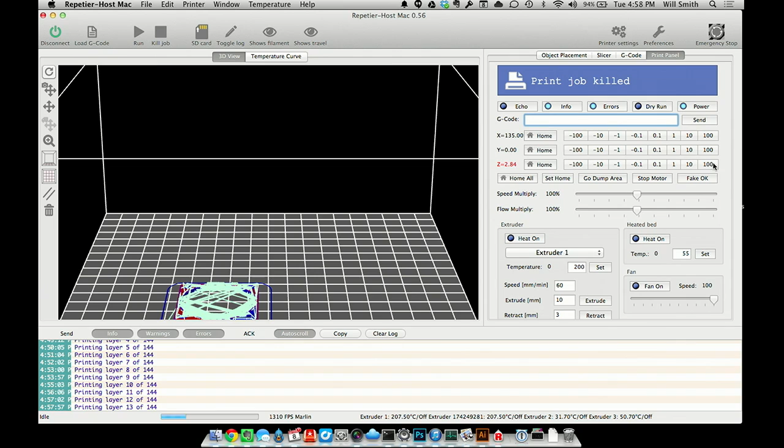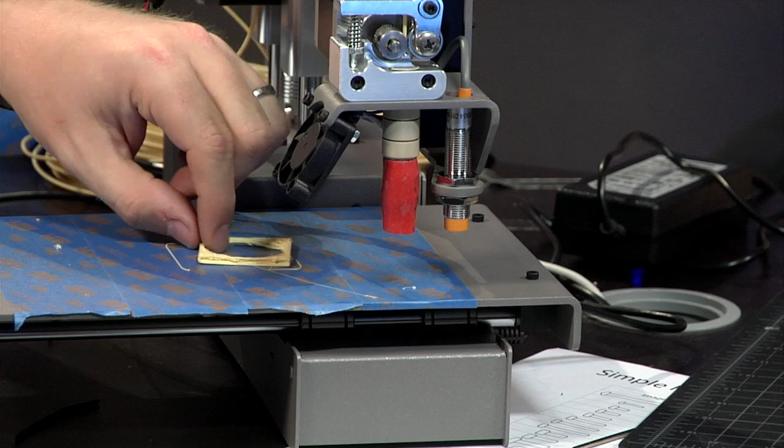All right, let's evaluate, see what this print looks like. Oh, we're back on. Can I pry this off? Pry duty, hold on. It's okay, I pried it. That's pretty fuggo. I think we can do better, Norm.

Let's take a look while you do that, I'll set up the next print. Here it goes, the very first 3D print from our office from a Printrbot Simple. You're right, it does look pretty fuggo. Yeah, it's not good, a little stringy here, a little stringy there. But the commands did work out. We will recalibrate more, and you might see the Printrbot make more appearances.

Oh, you think we shouldn't? I think we should start another one, let's see how this goes. We'll start another one and wrap it up because we're at an hour now. Do you have someplace to be? Yes. Okay, let me start the G-code then.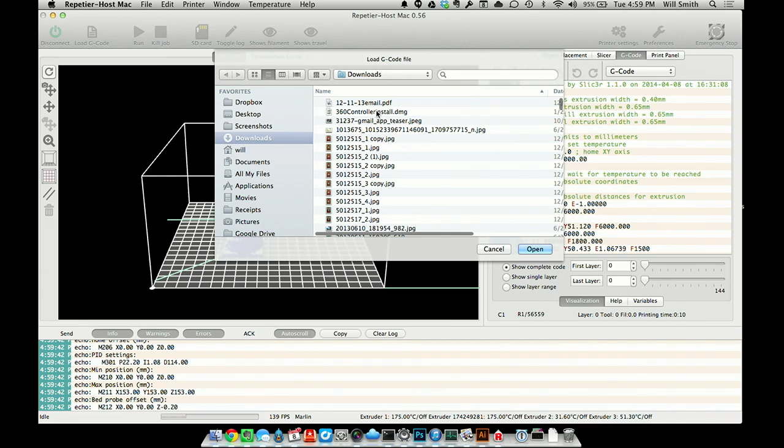Loading G-code. Where did I save the G-code? Desktop. Oh, simple fan shroud. Simple fan shroud G-code. Okay, let's try it again. Oh boy.

Wait, did you make any difference? Yeah, I changed the Z-axis 0.2 of a millimeter. I'm going to wipe it with an isopropyl wipe. That just gets the finger oil off, which means the print will stick a little bit better. Ironically, it also takes off the Scotch blue branding on the printer.

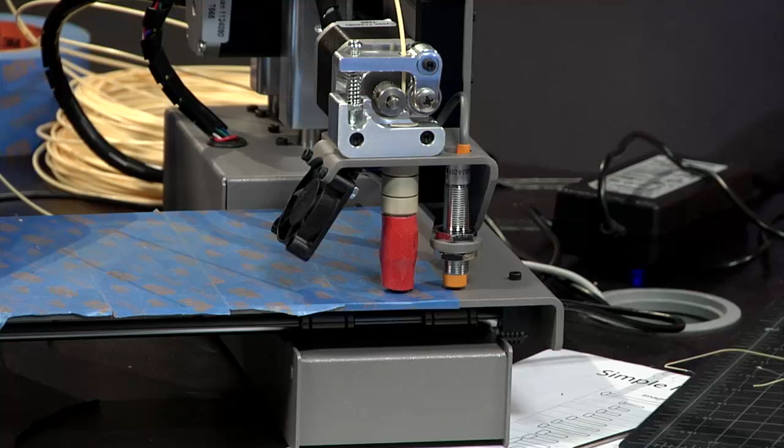So it's leveling, it's checking the level, checking the corners. That's pretty good, oh it's good. It's heating up now. It should be heating up now, and it says 10 minutes, 16 seconds. Okay.

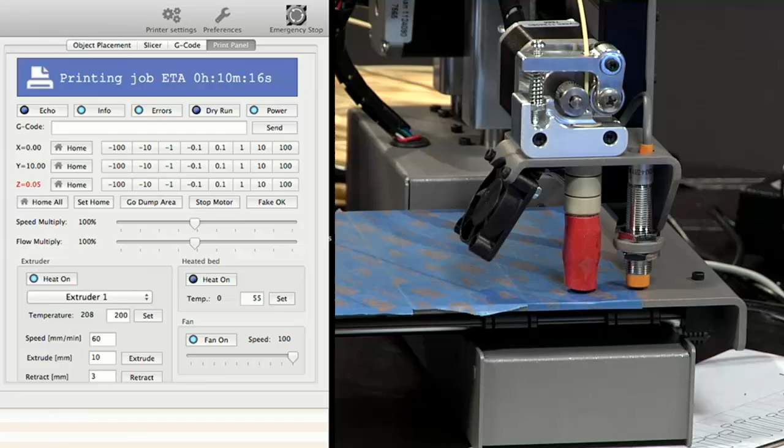That dip in temperature, that's when it turned off. Are you going to turn the fan on or off? I don't know, turn it on. It's almost to temperature, almost there. Oh, there we go, fan's on. Let's see, oh, that looks a little bit better.

Not bad, not bad. I don't know what those little divots are unless they're just pads to help the edges stick better. That's a lovely song, it is a good sound. That looks pretty good, that's a pretty good looking circle edge. Kind of a circle, I don't think it's supposed to be a circle.

The neat thing about this software is you can actually see, if I can do it.

Now the adjustments you made to the Z-axis, you just did. I did it with G-code, you didn't manually level or anything. You saw that, you assume, based on your experience, that kind of messiness, that kind of stringiness. Was looking at 0.2, a tenth. I almost went with the tenth. The instructions recommended two tenths, compensated two tenths. And I feel pretty good. I think maybe we could go even one notch further.

Yeah, this is going to be really glued onto the paper though. Sometimes with PLA you'll get it stuck onto the tape, and you end up with a little bit of tape on the bottom of your print, which is okay.

Now, if you cut over here, you can see the print happening on the 3D view, and it's showing you where the print head moves with this software, which is really cool. I've not seen that before.

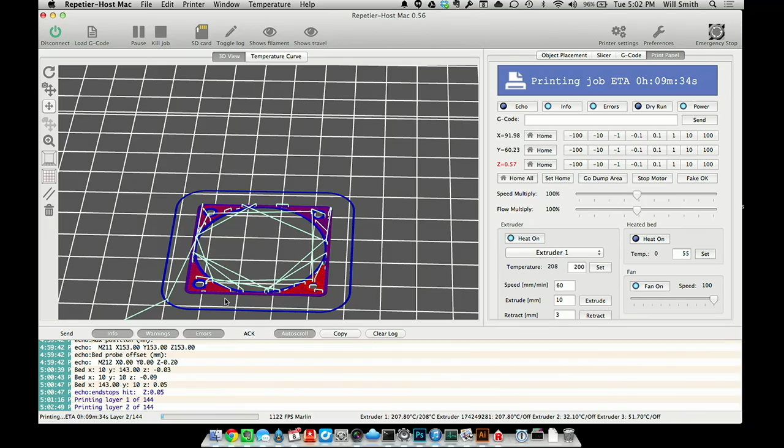And see, circles are hard because it's a stepper motor. So in order to make a circle, it's kind of like an Etch-a-Sketch. You turn the two knobs, and you have to do it at a very precise rate. The accuracy of your steppers is what determines how good your circles are going to be.

Did we ever tighten the X belt? The belt on the X? I did. Okay, or the Y belt, you mean? I tightened the Y belt underneath the build platform. I tightened the X belt and the Y belt. The X belt I tightened while you were doing something else a while ago. Okay.

Well, it's working. I think it could still go a little bit lower, but this is probably okay. This could also just be a kind of crappy slice.

So it looks like on this picture, the white bars are the travel lines, the red bars are the current layer that's being filled, and the blue lines are the previous layer.

Computer numerical control. Yep, it's the future.

I don't know what that was. Whoa, see, that's weird. Well, that's putting the screw holes in, I think. It's not doing a good job on those circles. I kind of wonder if letting this one slice itself might be better.

Did it slip? Ooh, whoa. Something slipped. Yep, abort. Well, hold on, let's see what caused the slip. It looks like a y-axis slip.

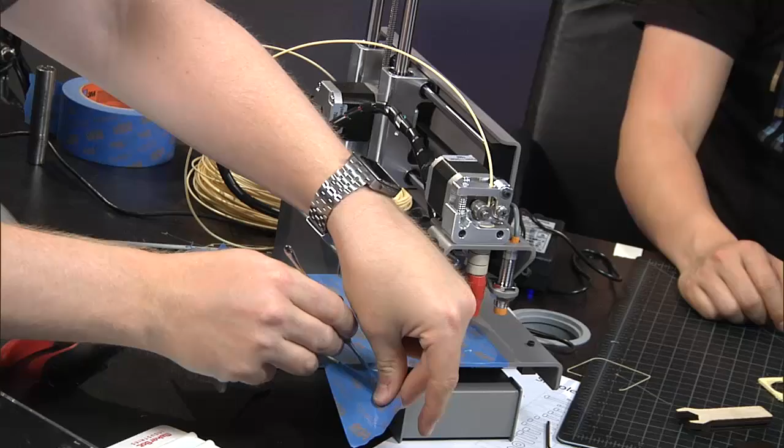Okay, all right, smooth that out, squeegee that out. Yep. Home X. Boom. Home Y. I'm going to go and move it down.

Oh, it's still slipping. Oh, there you go, isn't it? I'm going to check, hold on. It's pretty taut. Yeah, but see, it slides. So watch, I don't know if you can see.

Which side is it sliding on? It doesn't, it's the y-axis that's sliding. I don't know which side. There's kind of...

Yeah, see, it stopped there. I don't know why it would stop there unless... I hope we haven't messed up the belt.

It's more or less the same spot every time, but the belt looks fine. I wonder if my gear is spinning. Is it on the rod? I'm going to look and make sure that the nut is still in a good spot.

That may be the problem, on the lock nut. Yeah, that's the problem.

Okay, so how am I going to fix this? For the set screw? Yeah, the set screw slipped. Loctite would have been good in retrospect.

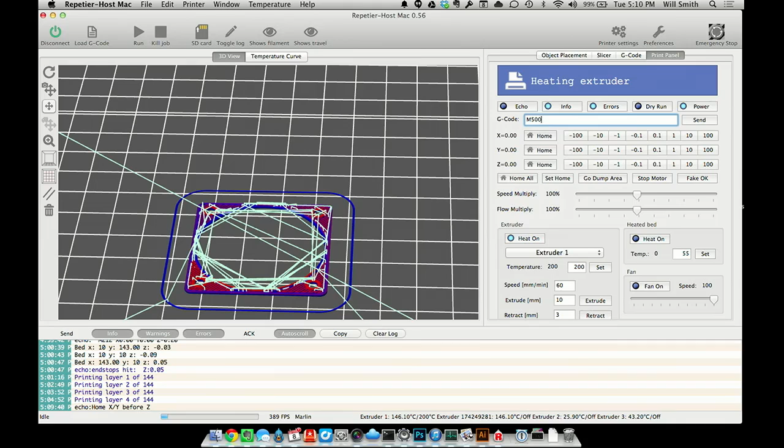and the M212 stuff. Okay, that's done. Now it's M500 to save. M501 is to verify my work. And now I'm going to do the bed probe offset stuff, and I'm going to do this 0.3.

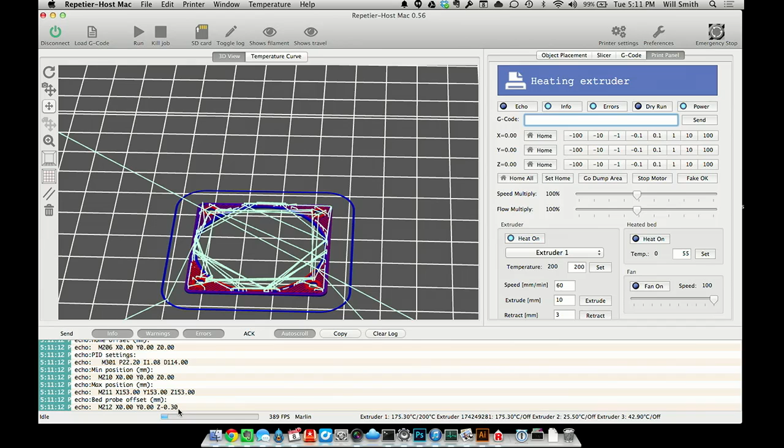So this is in millimeters, I assume. Mm-hmm. And now it's M500, M501. Okay, bed probe offset, so the offset is 0.3. We should be, let's try it again. Play. All right, check your corners.

Okay, it's heating up. Still have some heating up. Tiny set screws, yeah, the extra set screws were in the right angles.

We shouldn't have needed those, I don't think. I'm going to give those back to you. Yeah, that's good, I'll just put them all in a box case someplace. And then I'll go buy some Loctite.

We're real close on the temperature.

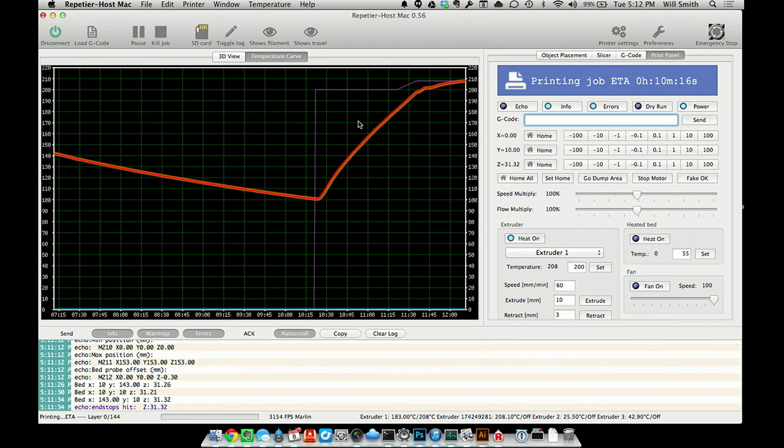So the slicing is one of the things that takes a fair amount of time, although with Slicer it's much faster than like old Replicator G and stuff like that. And it depends on the complexity of the slice, the complexity of the model, the amount of overhangs, the number of holes, stuff like that all makes a difference.

Okay, that looks good. Just gonna do those four corners. There's a circle there now, finally. Oh wow, that's much better than before. Oh, that's a nice looking circle. Wow, okay, oh, that looks good.

So after this print finishes, I've got to set the default settings for Slicer, which tells the slicing engine what this machine's capable of, how big the print bed and all that stuff is, and then we can go.

You can actually process STL files and do things like print a mystery object, which I guess is no longer called the MakerBot mystery object, so we'll just call it print a mystery object. Print some mystery object. Yes.

We have battling 3D printers. I'm super interested to see how this compares to the MakerBot, because the MakerBot, the Replicator one that we have, was a $2,000 and change printer. This is a $550 printer, much closer in price to the original Cupcake. But already I'm kind of impressed with the capabilities.

I'm going to turn that fan on. Although you have it printed in PLA, you're printing in ABS. I print PLA some - like if you look at the stuff we've printed, the things that are that kind of lemony yellow color are PLA, the clear blue stuff is PLA. I prefer the ABS, I think it's a little bit easier to work with, and seems to be a little more predictable with the extruder that's on the Replicator one.

Let's jump forward ahead. Yeah, I think we're gonna high speed through this and get one final wrap up when it's done. I think that sounds like a good idea. Speed it up, speed it up.

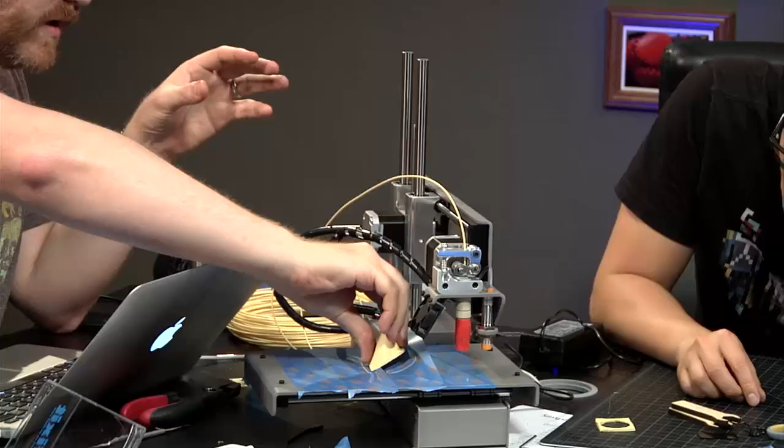Yeah. But pop it off. After, that's okay. Well, that's all right. We got plenty more painter's tape.

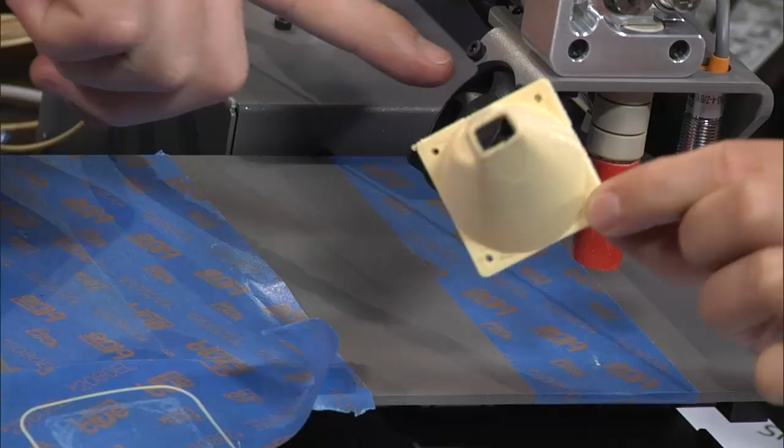Yep, the end result is really good. Here, I'll put it down here. Maybe Norm, you can - there you go, right there. Watch out, that hot end's still probably pretty hot. So I think this is going to go on underneath the fan between there, and the nozzle will point down direct right onto the freshly extruded plastic.

Let's look at this print. Really pleasantly surprised by that. It's pretty good, the screw holes are there. Circles are hard, it did a good job on the circles. Holes are hard, it did a pretty good job on the holes. It looks like a 0.2 millimeter print. It's definitely not the finest we've seen.

Can I see? Yeah, I would think that that's a 0.2 millimeter. The top's a little bit rough, I don't know exactly what happened there. It looks like, maybe 200 microns. It was a little bit wobbly at the top there.

I'm going to set up the slicer and stuff like that. We're going to maybe try using this to print the mystery object in the future. I'm definitely going to set up Octoprint, Octopi, for this because I'm super interested to see how that works. And I want to see if we can set this up so it'll run a little bit more remotely, and I can just feed G-code to it over the network.

If we get that working and we get it going, then I'll do a blog post on the site as well as a short 5-minute video so we can show what you can do with it and how it works, for anybody out at home who may be interested in trying that with their own 3D printer. But that is the Printrbot Simple. It's the first of our month of builds - the July Buildopolis, which will bleed into August.